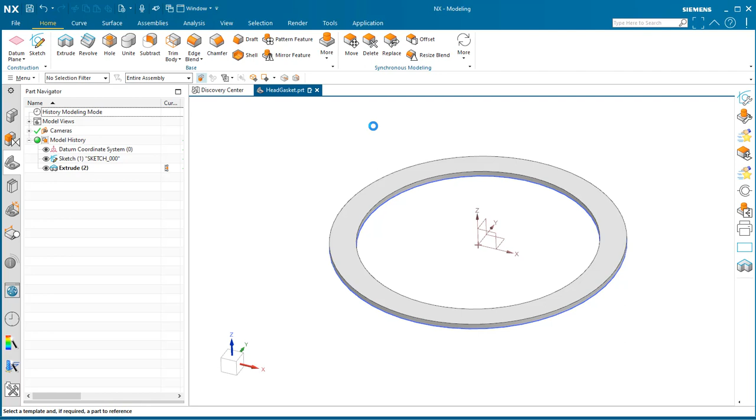File, new. And we're going to pick a different type of template this time. We used the model template last time. This time we're going to use a drawing template. I'm going to use my own border.

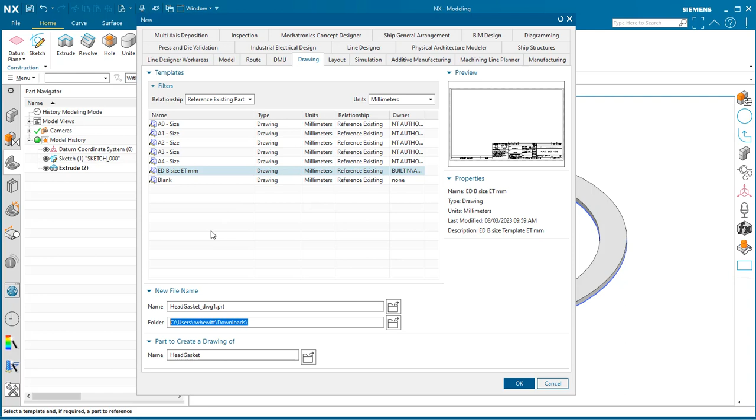Now I'm saving mine in the downloads because I'm throwing my stuff away. But you want to make sure that you save this in an appropriate directory. You want to save it in the same directory or folder where you made the original model. We're going to actually tie these two models together, these two PRT files. When you make a drawing in NX, it's the same file type as it would be if you were creating a model. So we're going to say OK.

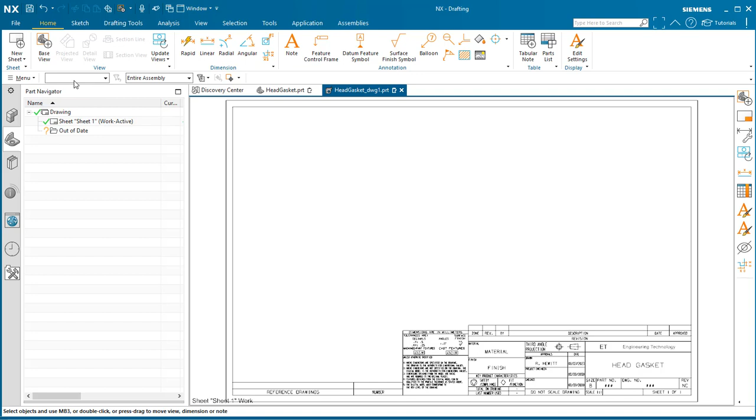And our border opens. You can just use the standard sample borders if you want to. Fill in the information. And then NX will prompt you to put in a base view. If that doesn't happen, you can just add a base view manually. So we'll come up here to base view. And if we come over here, you can see sort of a preview of what that view looks like. It shades the preview, but that doesn't mean that the actual view is going to be shaded.

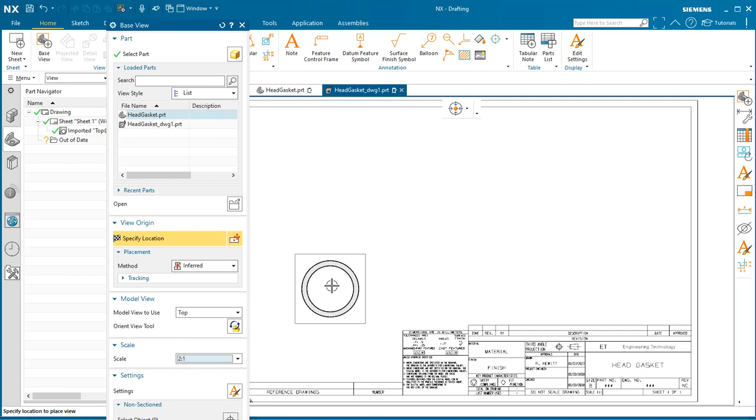Now I'm going to change the scale to make it a little bit larger on the paper. And I'm going to set the view down by clicking. Once you've added that view, it's going to automatically start to project views. So this is handy when you're doing several orthographic views based off of a single view. But we just want the one view right now. I'm going to zoom in. The zoom controls work pretty much the same as they do in the model application.

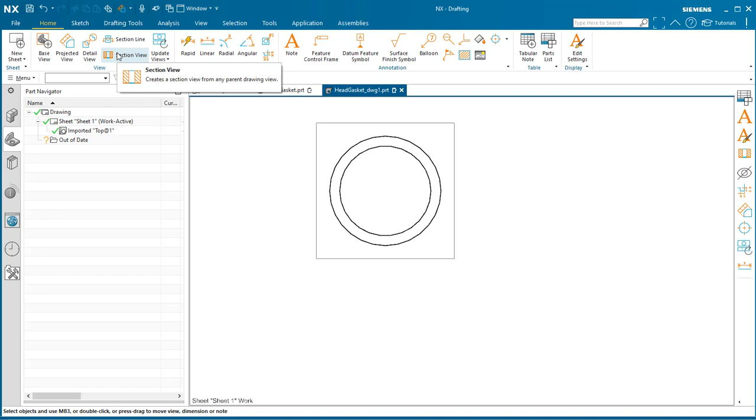And I'm going to start by adding a section view down below this base view. So I'm going to click section view. And I want the section to go right through the center of my head gasket. So I'm going to pick that center line. And then I'm going to pull straight down. I want my section lining to be a little bit more tight. I'm going to right click on that and say edit and change the section distance to 1 millimeter.

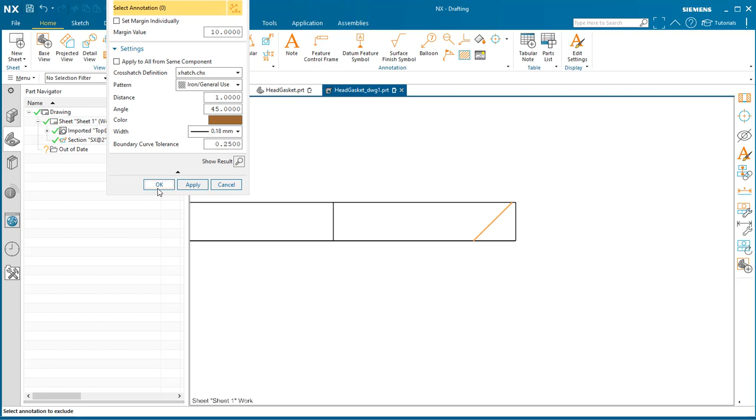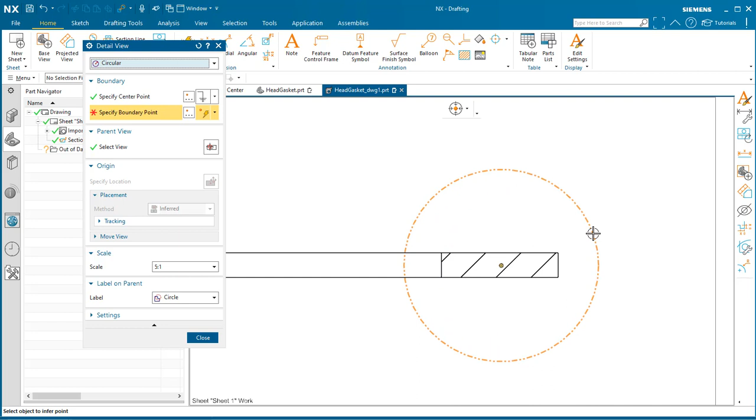Now I'd like to have a detail view of that. I'll select detail view, keep the defaults, come to the middle of that area and pull my detail circle out, and you see it automatically increments to plot the detail view. I'm going to increase the scale even more to 10:1 and place the detail.

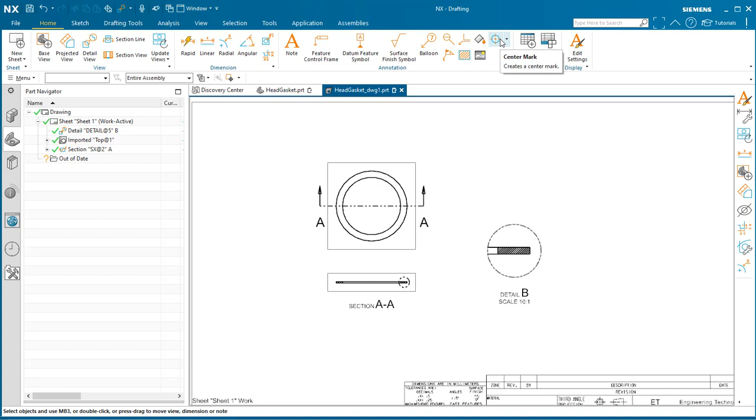Now I want to put some of my drawing annotation on. I'm going to start with these center lines. I'll go to the center mark command and I'll touch the center. Now in this case I don't want my center lines to overlap with my cutting plane line. So I'm going to say set extensions individually and I'm going to pull these two in.

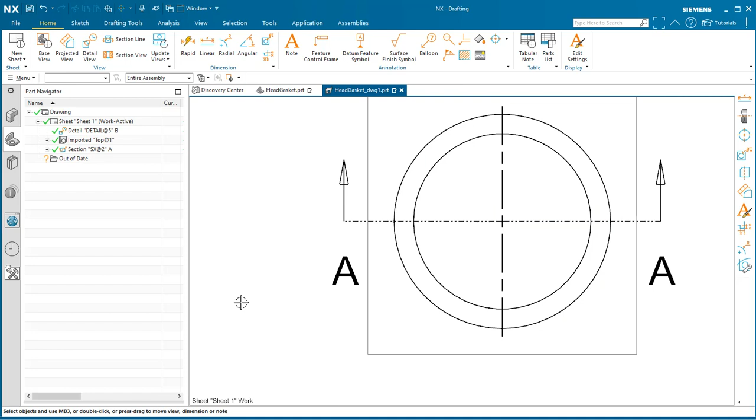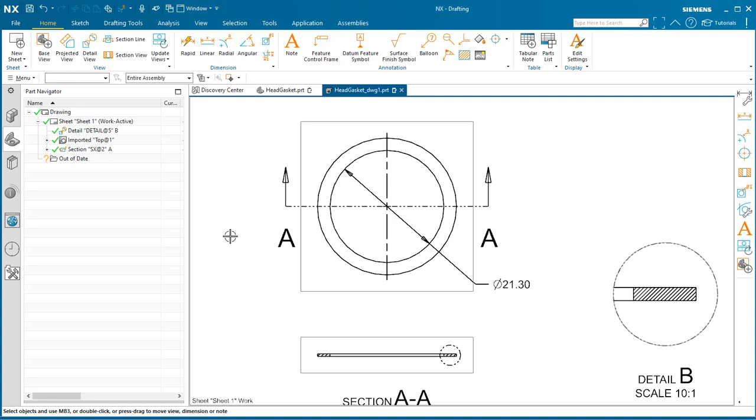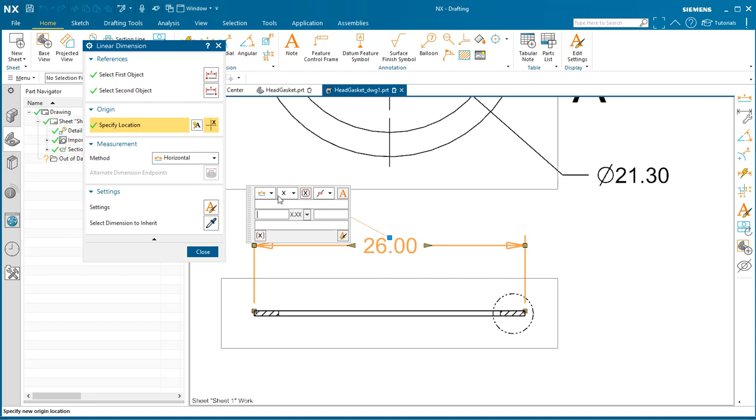Now I'll put a dimension on. The radial dimension automatically adds the diameter symbol if it's a diameter, or a radius symbol, R, if it's a radius. Now, in the rectangular view, I want to dimension the outside diameter. But since it's a diameter measurement, this needs to have the diameter symbol. So I'm going to go to Edit. And up here, I'm going to pick cylindrical.

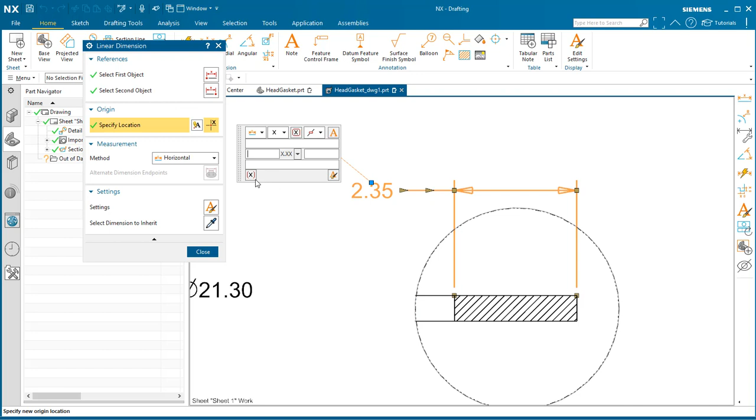In this view, I'm going to add the reference dimension. Now to make it a reference dimension, right click, edit, and add the parentheses. One more dimension for the thickness. And there it is. Now we can add another view to show the isometric.

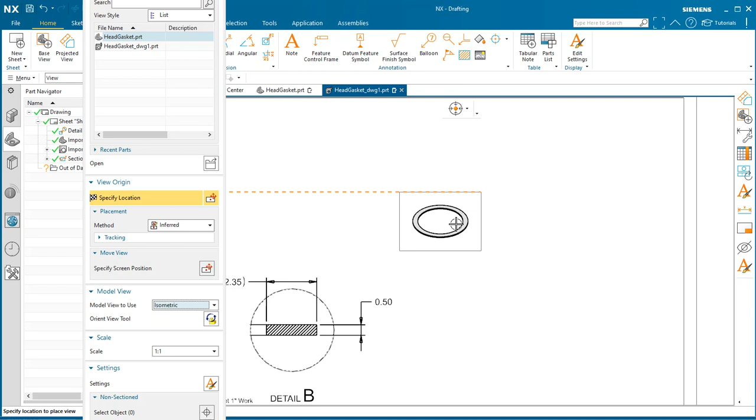Base view. I'll pick isometric, increase the scale, and place a view. To make it shaded, I'm going to right click, go to the settings, I'll go to shading, and fully shaded.

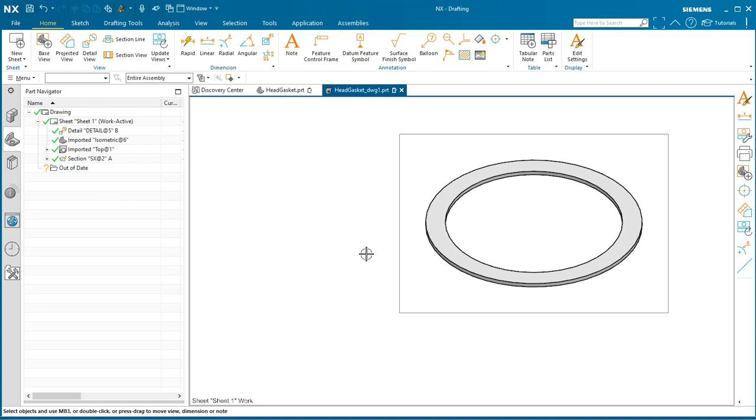I want to show the label that this is detail B on this parent view. So I'm going to right click on the detail view and go to settings, where it says label on parent. I'm going to say label and apply, and that will add the note.

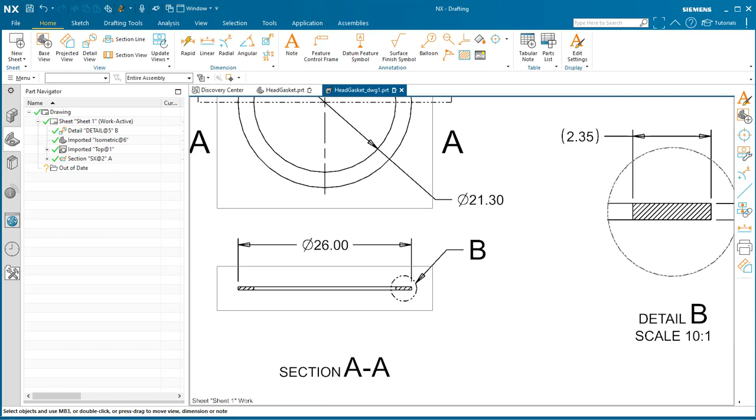Now to print, I'll go to menu, file, print, and I'm going to print to a PDF. When you print the file, it will remove things like these borders around the views, and it will clean up the hidden lines and the line breaks for things like the cutting plane line and the center lines. And that's it.